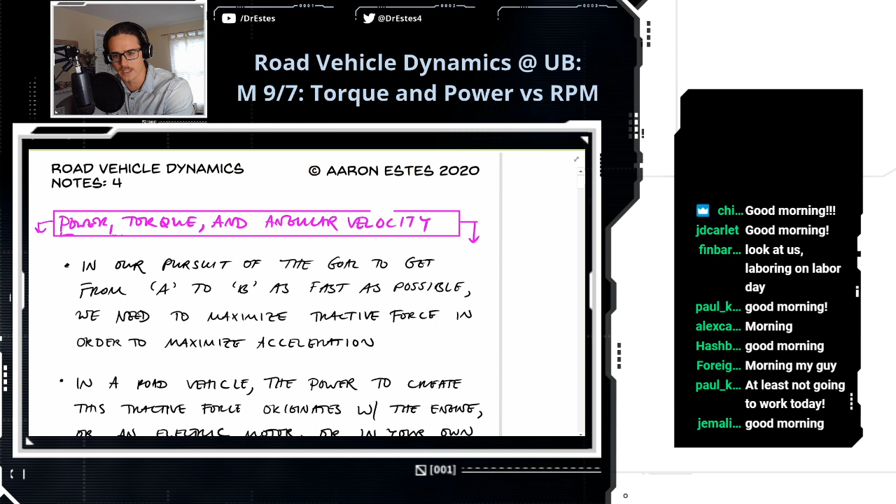Are any of you guys on a cell phone right now, just chilling on a lake somewhere this Labor Day? You're in a kayak, out in the wilderness. Are we gonna finish the example? Oh yeah, shoot, good call, Phil. Before we get into that, we have an example we have to finish. It involves a guy named Baxter. Thanks for reminding me, I totally forgot about that. We gotta finish that. There's almost a storm outside. Yeah, that's true, it's not the nicest day per se. I took a nice little walk this morning though. It was sprinkling just a little, and not too much though. Storms are exciting, yeah. I like being outside when it's got a nice little breeze, but it's not super cold. Maybe there's some mist in the air. Okay, let's get started. A walk? What is that? Yeah, walk, I did it.

Okay, let's finish this example on the unicycle.

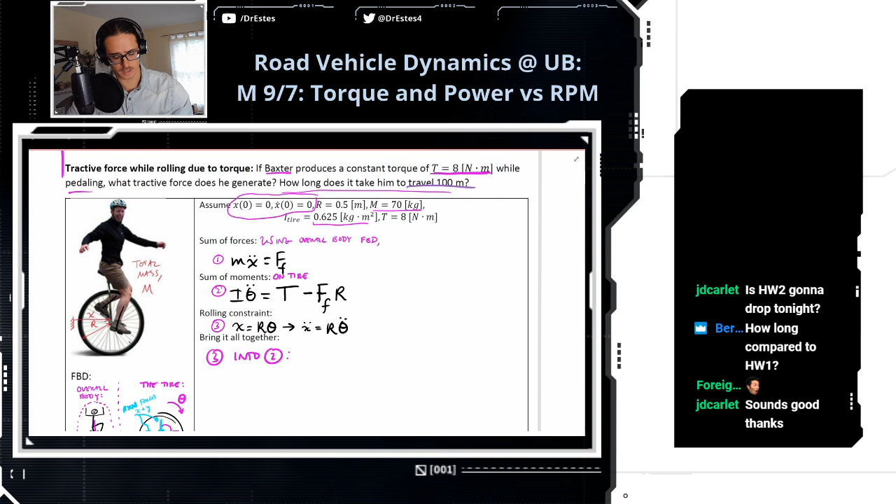So what we were setting up last time is the equation of motion for this unicycle. Just to quickly recap, you start with a free body diagram. We had the overall body, which includes Baxter and his unicycle, and so the only forces coming into this system are the friction force at the road interface, and then we have the weight and the normal force. The normal force, once again, to prevent him from clipping through the floor. We also did a free body diagram on the tire, and this is going to give us a relationship that lets us solve for this friction force.

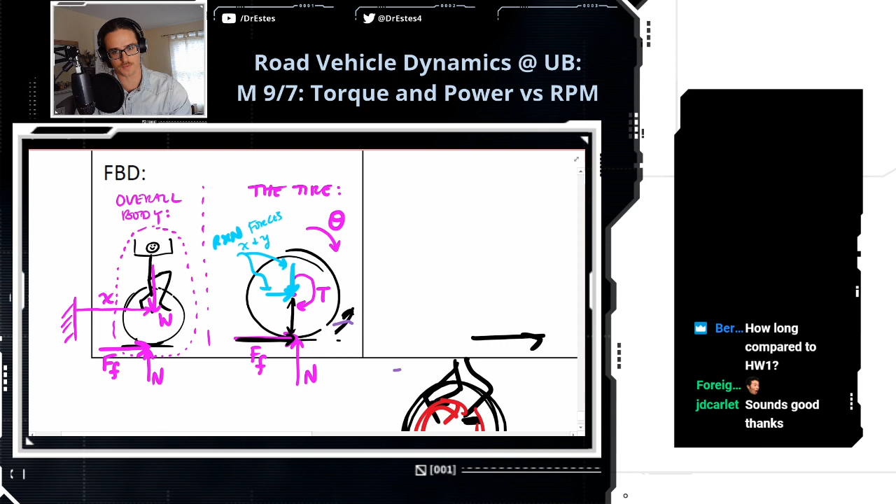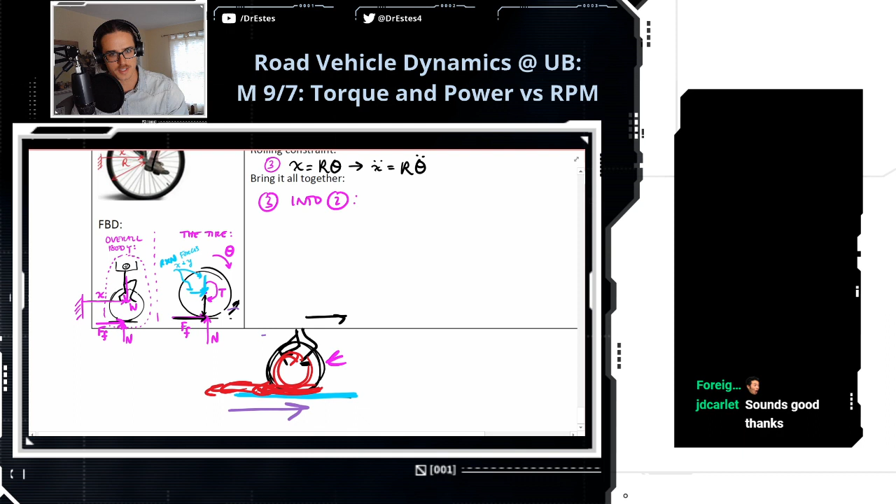So I don't know what was happening here. Looks like the unicycle is bleeding. We were discussing something last time. That's okay.

So we got these equations. We have this sum of forces: the mass times the acceleration is the friction force. We do the sum of moments on the tire: the inertia times the angular acceleration is the torque, but the friction is fighting that torque a little bit. And then we have this rolling constraint.

Yes, Baxter bled out. He won his race, expended all his energy, and then he died a lonely death.

Okay, so we're going to sub equation 3 into equation 2. So what I'm going to substitute from equation 3, I'm going to have the angular acceleration is the linear acceleration divided by r. And then I'm going to sub this theta double dot expression into equation 2. So we're going to have the moment of inertia times x double dot over r is the torque minus this friction force times the radius of the tire, which was half a meter.

All right, now if you look at equation 1 up here at the top, I'm going to solve for the friction force from that equation. So that's easy to do. I just got—oh wait, it's already solved. No, I want to solve for the acceleration.

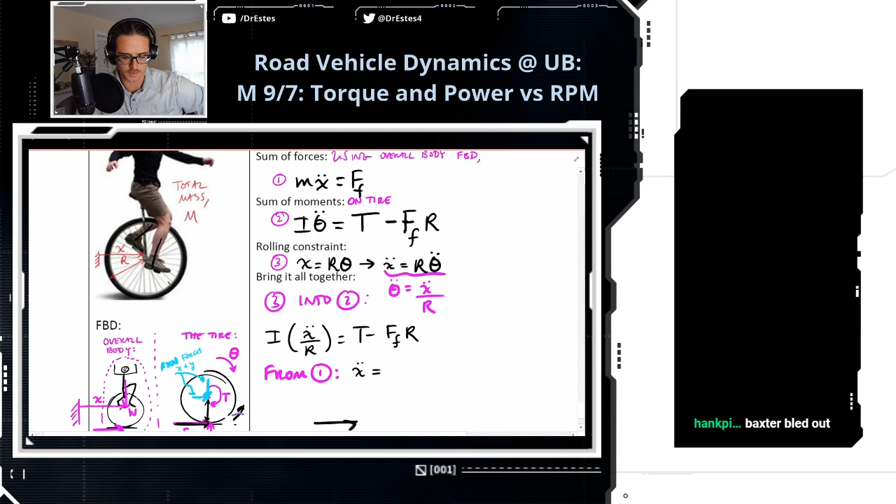Because then this will let me get an expression for the friction force, that's what I wanted to do. So the acceleration is that friction force, which is the tractive force, divided by m. Friction force and tractive force are kind of interchangeable here.

I want to substitute this acceleration expression in right here, so let's do that. I times the friction force over m times r is torque minus the friction force times r.

And then we're going to solve for the friction force here, and it'll be in terms of the torque that our friend Baxter is applying. That's kind of the relationship I wanted to show here, how torque at the pedals ultimately translates to tractive force at the road.

Okay, so we're going to go like up here. So the friction force, if you go through the work, it's going to be the torque over the radius of the tire plus the inertia of the tire, over the total mass times r.

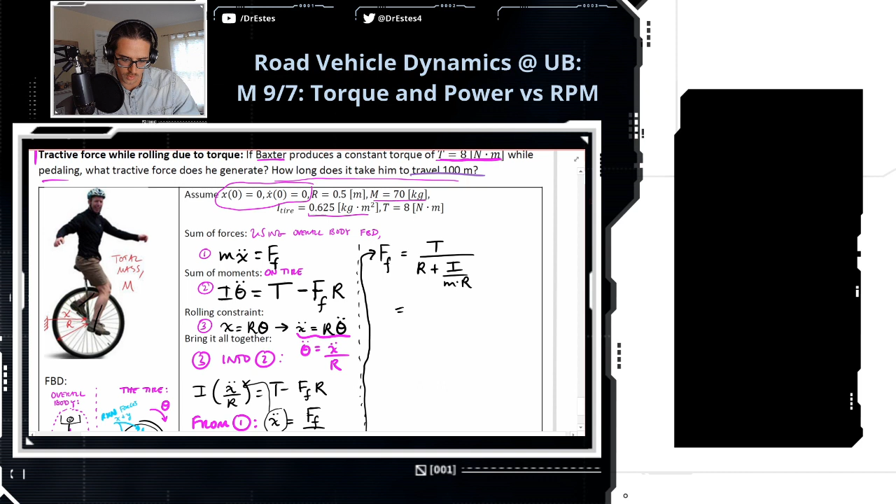And if we substitute in all of our numbers, we had 8 Newton meters of torque, the radius was half a meter, the inertia 0.625 kilogram meters squared, blah blah blah. So we're going to sub that in, and we're going to get a constant: 15.45 newtons.

All right, now given that he's producing this force the whole length of the race, let us figure out how long it takes him to finish that 100 meters. So I'm going to go back to equation 1, because now that I know the friction force, I can solve for the acceleration.

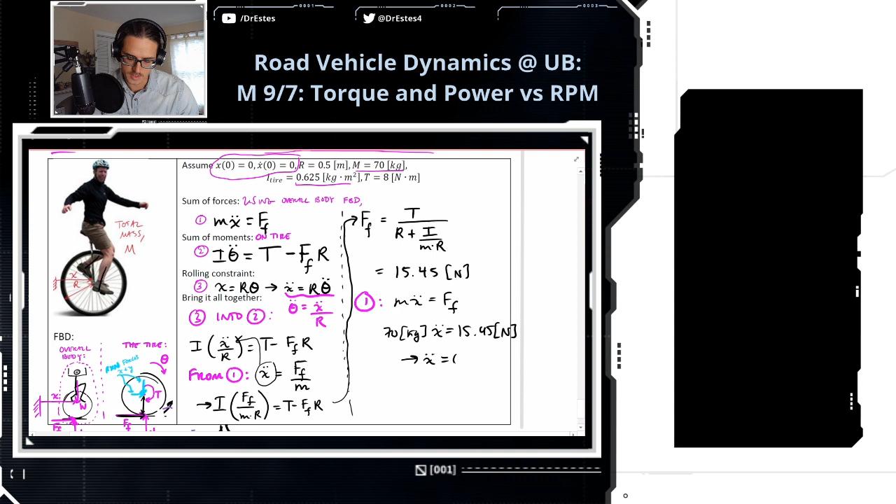Mass times acceleration is the friction force. So I got 70 kilograms between Baxter and his unicycle, times the acceleration is 15.45 newtons. So the acceleration is 0.22 meters per second squared.

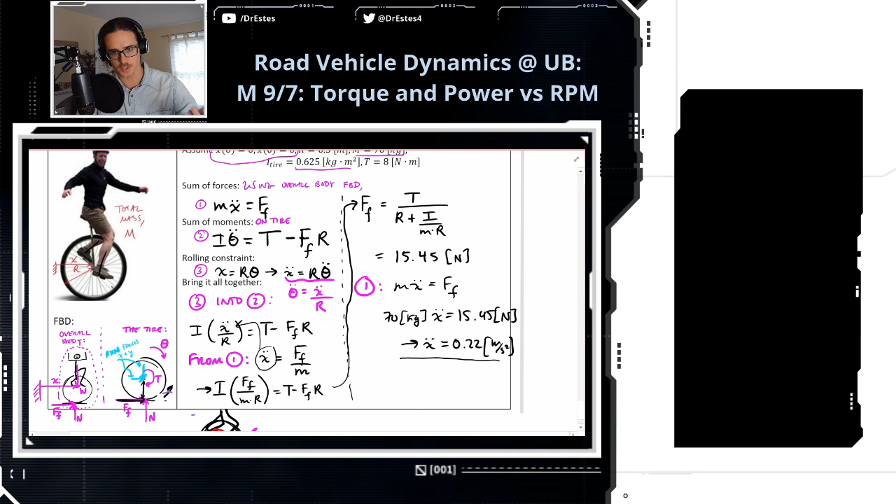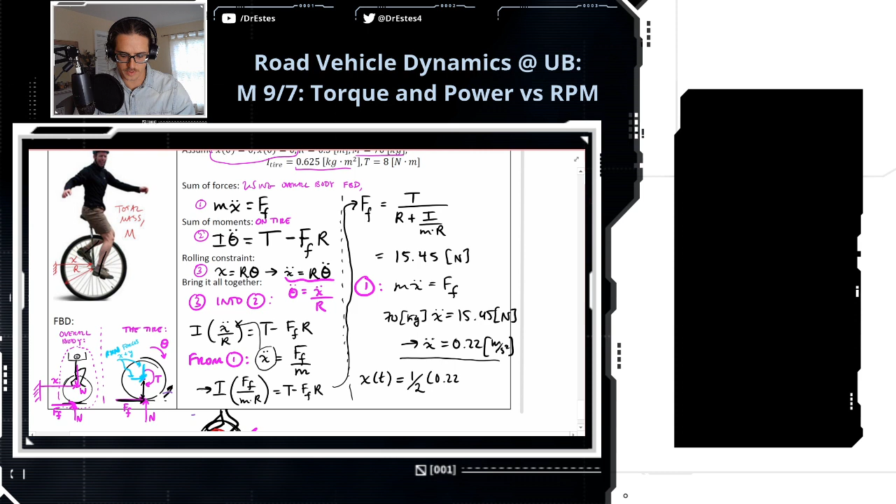And then from here, we can go back to our constant acceleration kinematic relationships. So from this constant acceleration, I know the position. If I start from rest, it's going to be 1/2 times the acceleration times t squared, so 1/2 times 0.22 meters per second squared.

And then we know the end of the race, he's going for 100 meters, so we can solve for the time that it takes him to get to the end. So it's the square root of 2 times 100 meters over 0.22 meters per second squared. Let's say this is the final time TF: 30.2 seconds.

I actually watched a couple YouTube videos of unicycle racing the other day. There's one guy who did a quarter mile, I believe, on a unicycle. He was going around a track at some high school or something, and he finished it in just under a minute. So if you think about that, Baxter's actually going pretty slow in this example. I'm going to re-engineer this example so that he's working a little harder next time, because 30 seconds for 100 meters is apparently not that impressive.

Okay, so just to clarify, the friction force is the tractive force in this example. That's exactly right, Finbar. So tractive force for a road vehicle is the friction force between the tire and the road.

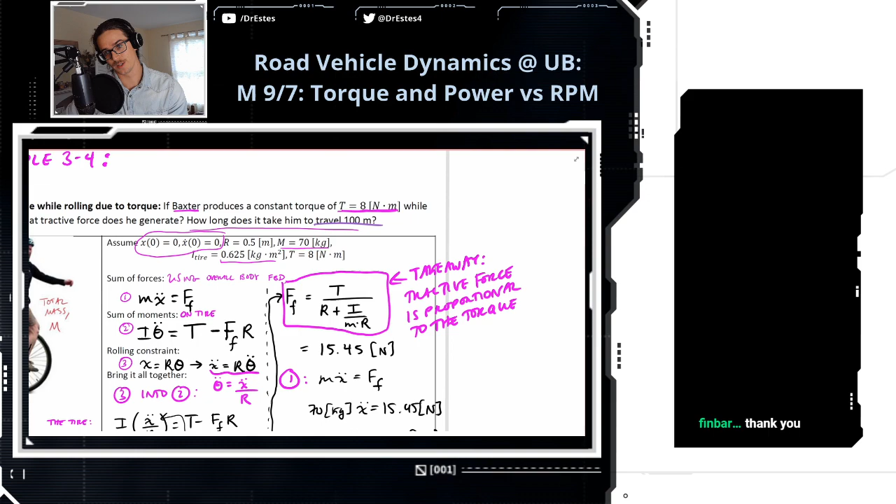Now on a bicycle, the human produces the torque. When we're talking about cars, it's going to be the engine that originates this torque. So that's a good segue into the next set of notes.

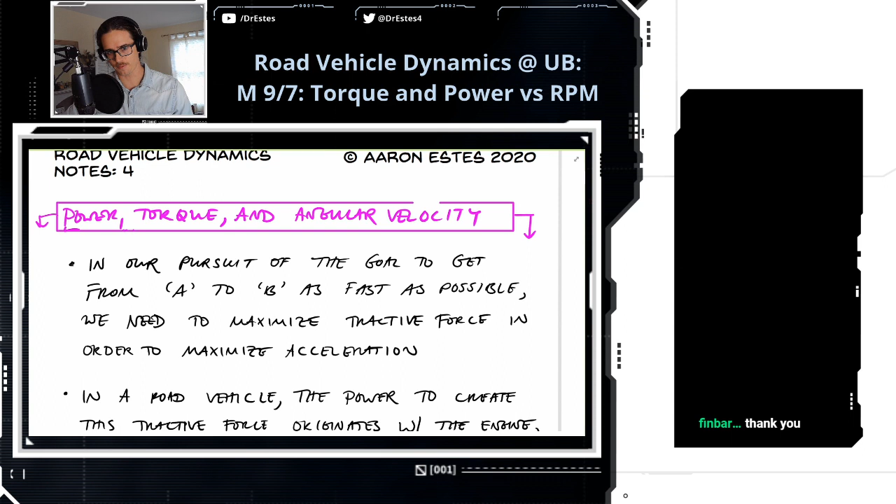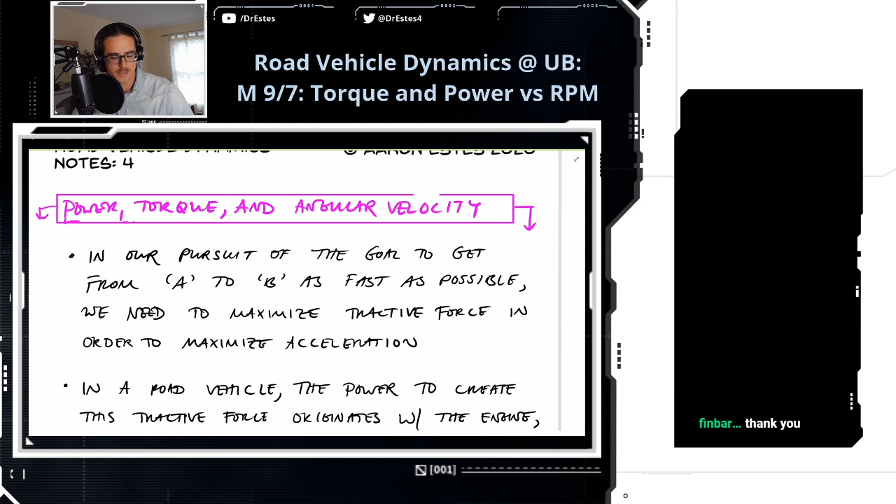Okay, so let's get into it. In our pursuit of the goal to get from A to B as fast as possible, that's our goal for this class, we need to maximize tractive force to maximize acceleration. Now, in a road vehicle, the power to create this tractive force originates with the engine, or if we're talking about a Tesla, it originates with an electric motor or a couple electric motors.

If the torque were too large, would it be slippery? Yes, we'll talk about this. You can generate so much torque that it overwhelms the ability of the tire to grip the road, so it exceeds the local friction coefficient there, and then you'll just spin out your tires. So it gets more complicated, but keep the principle in mind: as much torque as possible is generally faster.

And this power, if we're talking about bicycles, which we're doing some bicycle examples because I think it's a little more intuitive maybe than a car, you generate that power from your own body by pumping the legs. So this power that we generate...

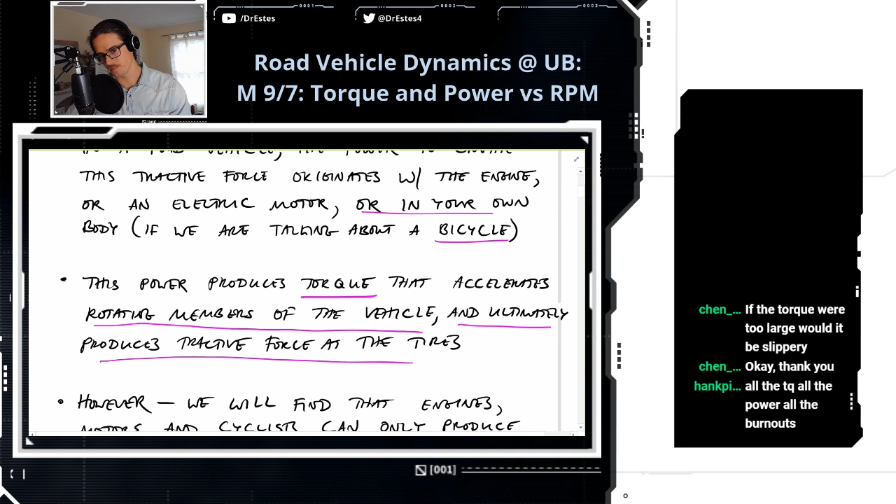produces torque, and we know torque is proportional to the tractive force. And this torque accelerates rotating members of the vehicle. We'll get into that probably Wednesday, like how it rotates the drive shaft, the gears, whatever. And ultimately, this rotation produces a tractive force at the tires, as we saw with Baxter. He rotated the pedals, and that produced a tractive force at the road.

Okay, so however, we're going to find out that engines, motors, and cyclists only produce torque and power effectively over a limited band of rotational speeds. So in the example, and we'll revisit this example, we assumed that Baxter was producing a constant torque for the whole race. And as the race continues, he's pedaling faster and faster because he's building speed. But he's producing the same torque the whole time, and that's not really realistic.

And because we can't produce torque effectively over all speeds, whether we're talking about engines, whatever, this is where gears are going to come in and save the day. But that's a topic for Wednesday when we talk about gears specifically.

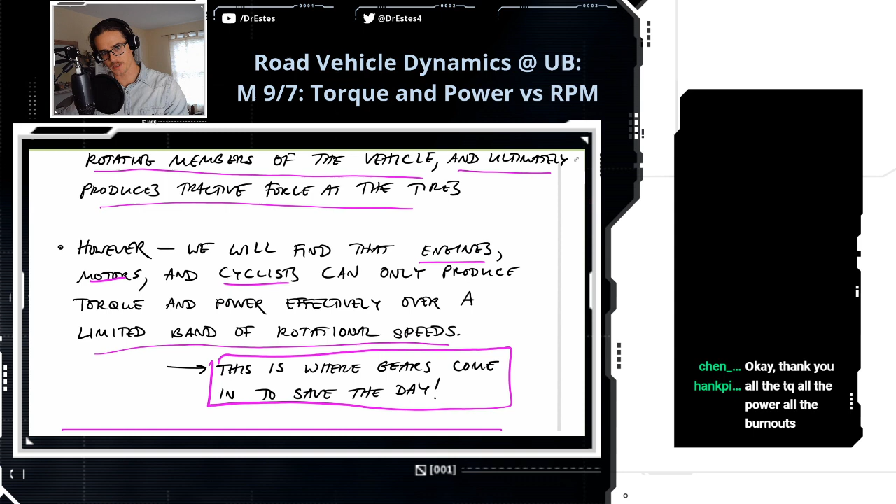All right, so let's talk about what power, torque, angular velocity is. What's the relationship? So we're going to talk about power. It's the time derivative of work. So if you have the handout, you can fill this along with me. And we know that the units of work, let me check my cheat sheet to make sure I got all this. Okay.

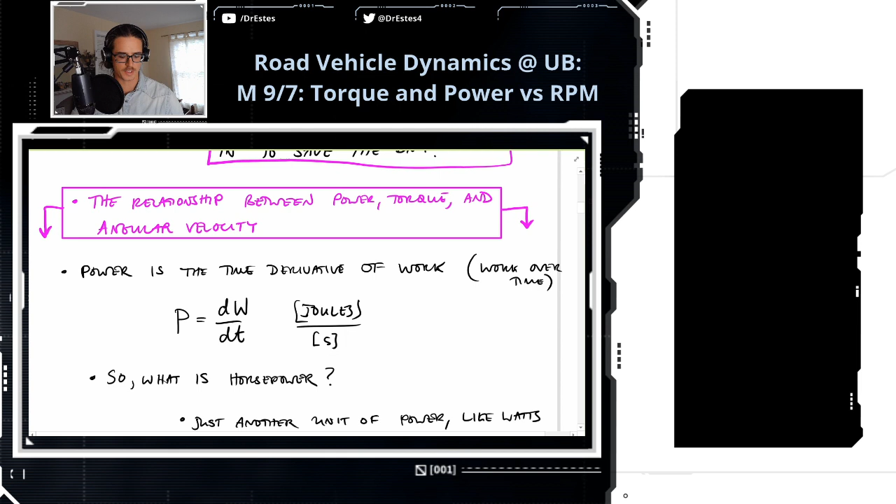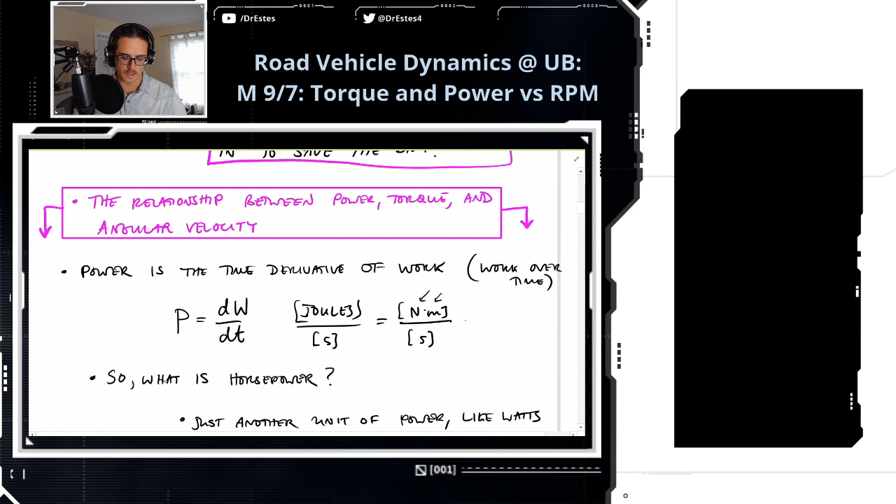Work is joules, time is seconds, so joules per second. So joules, that's also Newton meter per second, like work is a force over a distance. And in SI units, we call this the watt. So the unit of power is a watt.

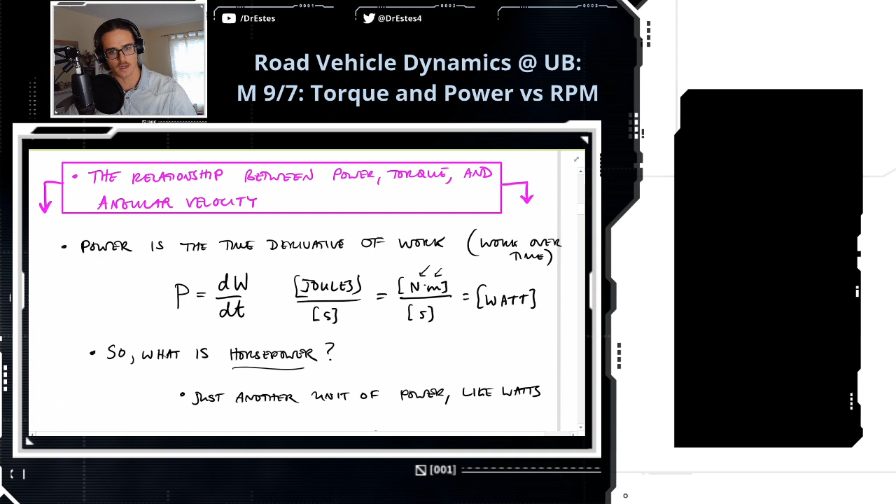But when we talk about cars, what is horsepower? Because that gets thrown around a lot. So it's just another unit of power, like watts. So it's just power, it's just a different unit. So let's break it down a little bit.

By definition, 1 horsepower lifts a weight of 550 pound force a height of 1 foot over a time of 1 second. So I made a little picture here. This weighs 550 pounds, we're lifting it a distance of 1 foot, and we're doing that by pulling over here, maybe it's a horse pulling it. And if we do that over 1 second, we've done 1 horsepower of work.

So if we dissect this image here, the work that is done is mgh, so the mass times gravity, that's the weight, 550 pounds, and we lift at a height h, which is 1 foot, and we do it over, well, I'll just put time here again, but it's 1 second. So if I put 550 pound force, that's the weight, I lift at a height of 1 foot, I do it over 1 second, that's 1 horsepower.

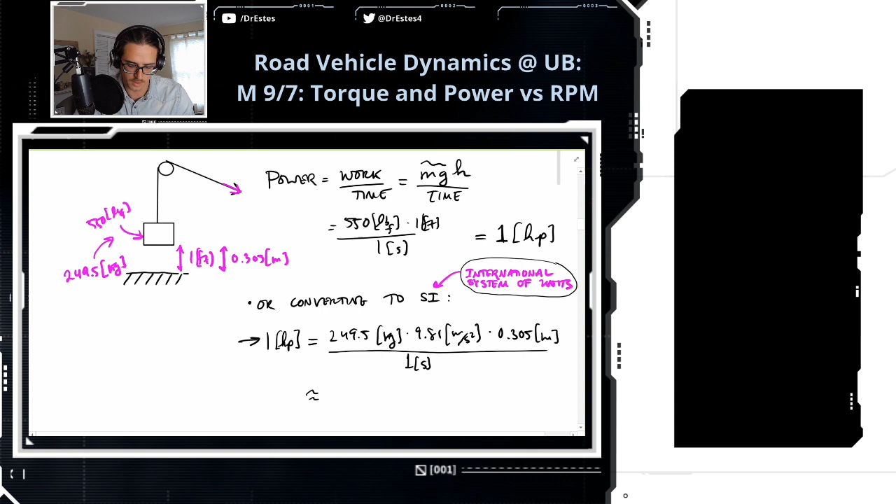249.5 kilograms is the mass, times G, 9.81 meters per second squared, that's the weight in newtons. Then we multiply that by the height that we lift this mass, or the horse lifts it, and put it over 1 second. So that's in SI units. If you multiply that all out, this is approximately 746 watts.

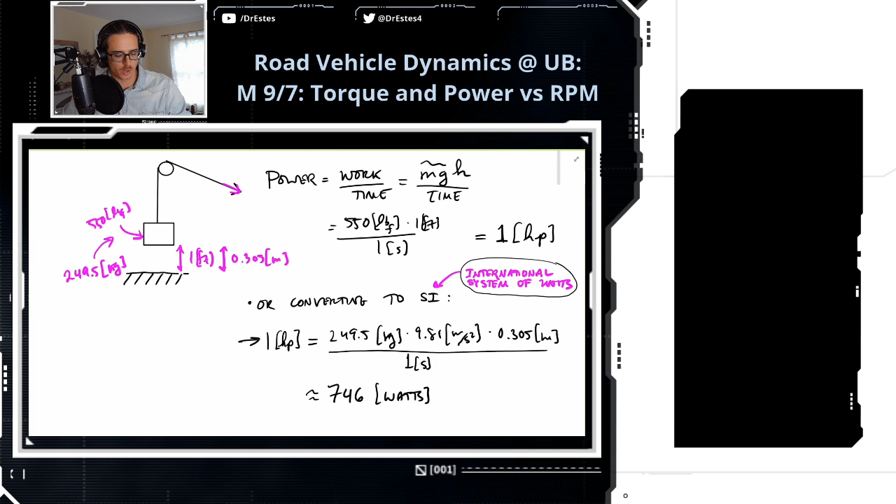So if you're producing 1 horsepower, that's 746 watts of power, or 0.74 kilowatts. All right, so that's horsepower. What is the relationship between power and torque?

The work done by a torque acting on some body, so it could be a cyclist doing work on the unicycle by acting on the pedals, or an engine doing work about the crankshaft. So the work would be the torque acting over an angular distance - torque multiplied by the angular distance over which it acts.

Think about translational work, it's force over a distance. So work done by a torque is very similar, it's torque over an angular distance. So the units work out for this: Newton meter, times radian, which is dimensionless, and I have an example about this later to show you why it's dimensionless.

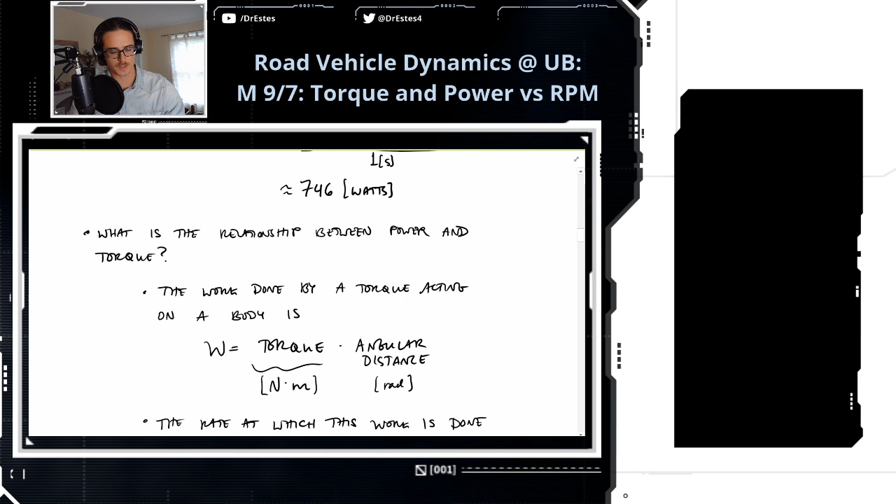So power is the rate at which work is done, that's going to be work over time. We can break it down this way: a torque and the rate over which it's doing work. So now we have Newton meters times radians per second. So power is a torque multiplied by an angular velocity.

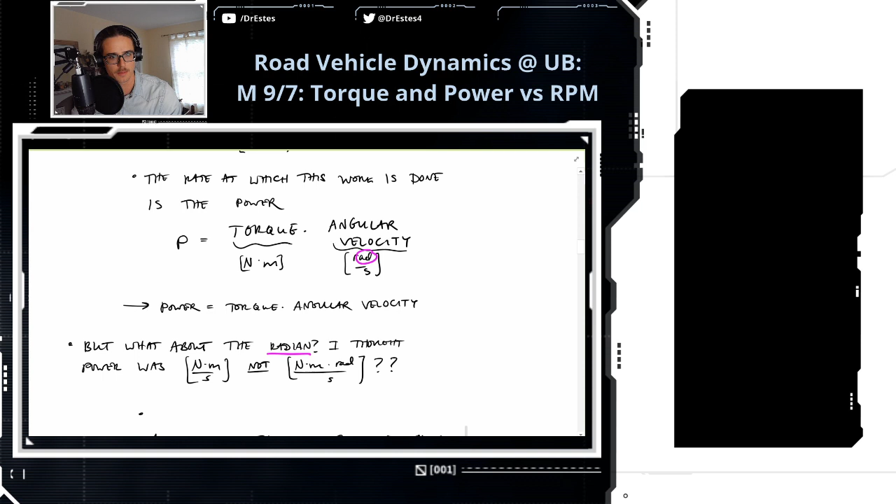But this brings up the question of the radian. What about this radians per second? Because up above I said that power was Newton meters over second, so joules per second or watts. I didn't say it was newtons times meters times radian per second. So the answer here is radians are dimensionless, but why, and what does that mean? Radians are dimensionless, so just pretend it's not there.

Okay, let's explain why. Why is a radian dimensionless? It is the angle, so it's a measure for an angle, but how is it measured? A radian is the angle subtended by a circular arc, as measured by - and we'll break down what this means, like subtended and whatever.

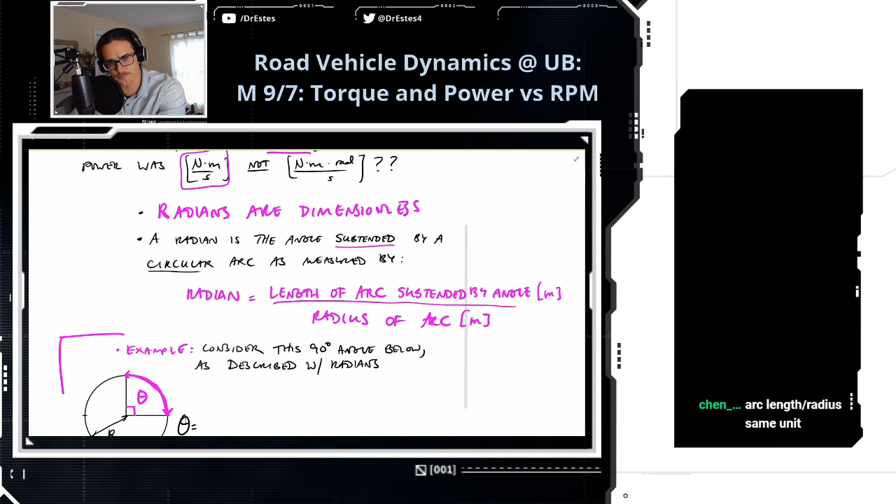But a radian is the length of arc subtended by the angle, divided by the radius of the arc. Arc length and radius have the same unit. This length of the arc is in meters, the radius of the arc will also be meters, or whatever length unit you choose, but those length units cancel out, so it's dimensionless. This will make more sense when we show an example.

So let's consider a 90-degree angle. We know in radians, 90 degrees is pi over 2, right? So let's show how it gets broken down. Here's the angle, theta. Now this circle - this arc is a circular arc. That's why I drew the rest of the circle here so you can see it's got a circular shape, but this is the arc subtended by the angle.

If you draw from the angle some lines projecting out, and connect those two lines with a shape, that shape is subtending the angle. So this is a special case where the angle is subtended by a circular arc, not some other shape. So let's get the length of this arc: if we did the whole circle, that would be the circumference, which is 2 pi r. But this is only a quarter of the circle, so it's 1/4 of the circumference. That's the length of the arc that subtends this angle, and we divide it by the radius of the arc, and this circle has radius r.

So you see what's happening, don't you? The r's cancel, and you're left with pi over 2. And the units are meters over meters, and those cancel. So when we say radians, it makes it sound like it's a unit, but really it's just an idea that describes an angle.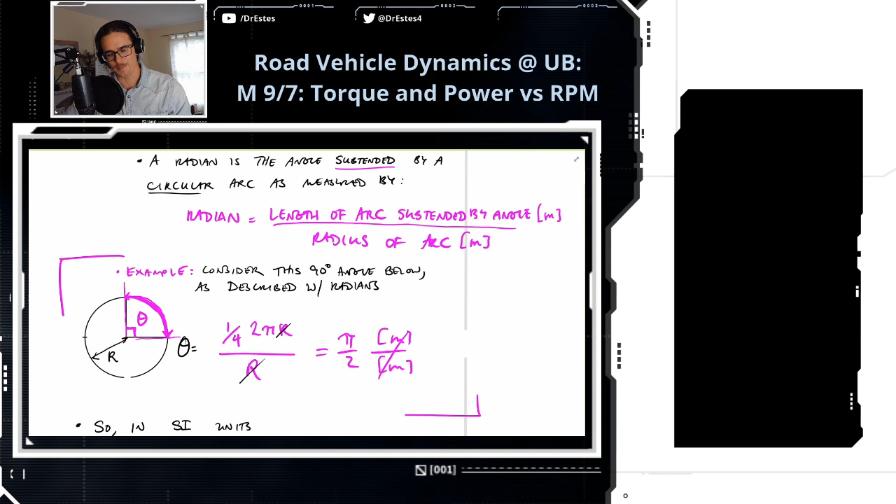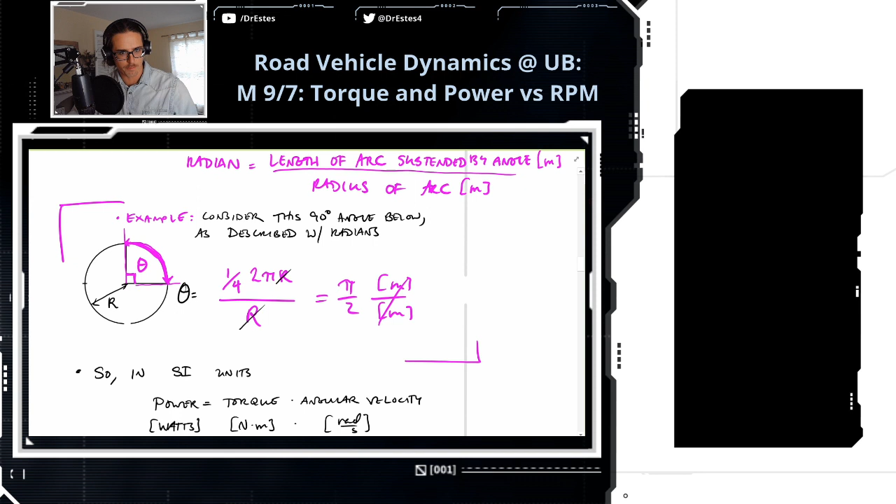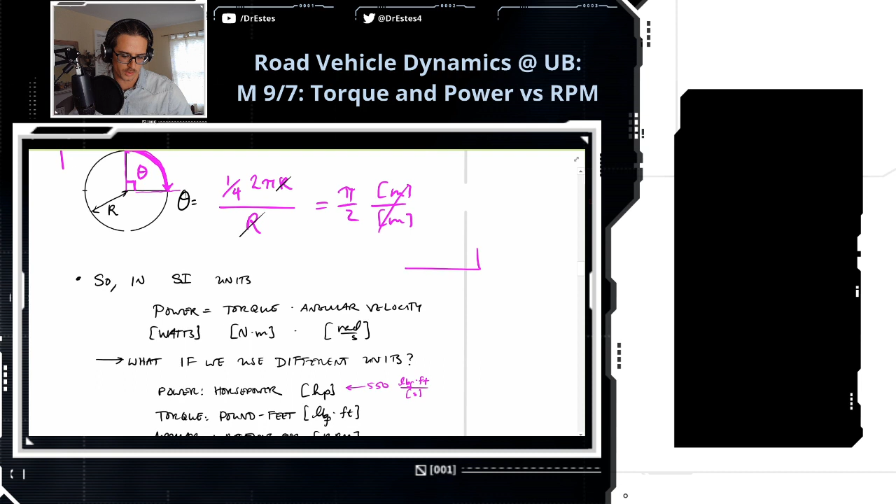Okay, so all that to say, just because we have power, which is torque times an angular velocity, really it's just energy over time. Now I want to show you something here.

When we talk about cars, there's a conversion we typically get into: you have your engine power in horsepower, that's popular. You have your torque in pound-feet, and then you talk about engine speed in RPM. So when people talk about vehicle performance, they might say it produces 600 pound-feet of torque.

I know it's particular, I'm gonna Google this real quick, I don't want to mess this up. It's foot-pound. Wait, you guys just contradicted each other. Pound-feet or foot-pound? Foot-pound, yeah I think it's foot-pound. Hank, what happened, wait you're wrong? Pound-feet? Wait, hold on, are you guys sure? It's pound-feet? Pound-feet, we should do a vote. Are they interchangeable? Okay let's see, you guys are saying pound-feet. They tripped me up. I've heard both, it's foot-pound. Newton meter is pound-feet, I mean like you could say it's the same, it's a foot times a pound, but people are really particular about what it is.

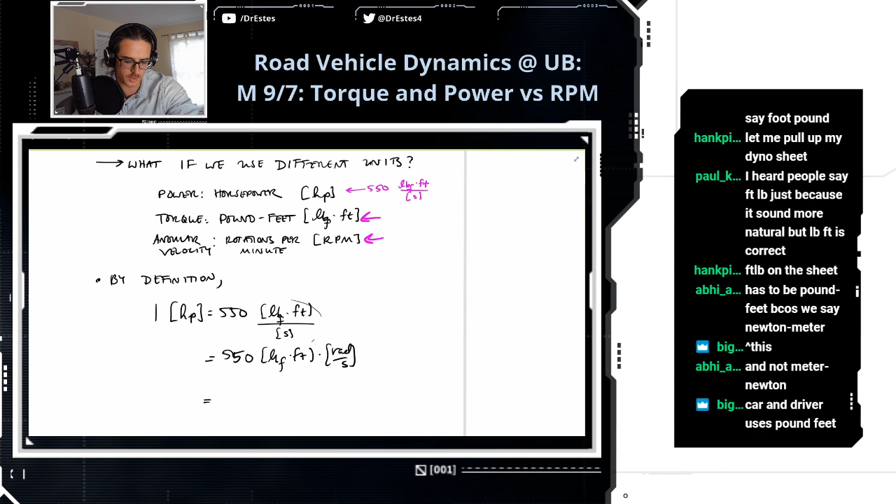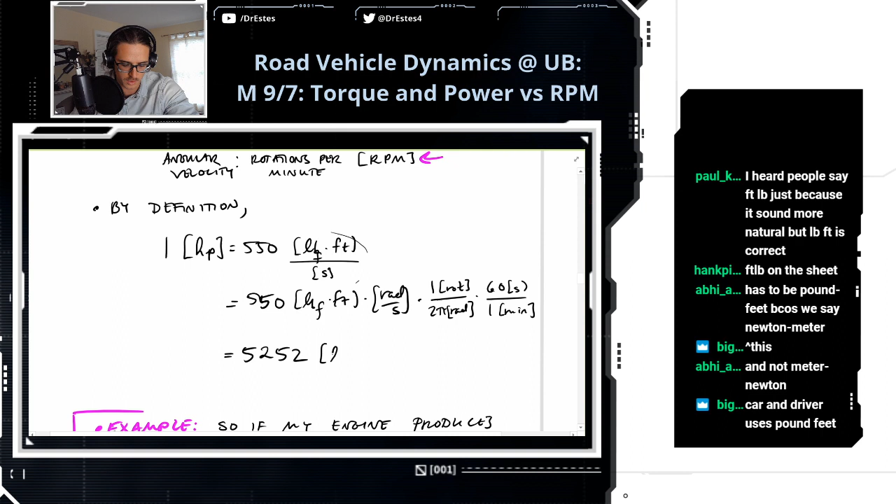Car and driver uses pound-feet, they're reliable, they're gearheads. So we're going to convert this radians per second into RPM. 2 pi radians is 1 rotation, and we know 60 seconds is 1 minute. So these units cancel, and when you multiply it all out, this is going to be 5252, and I'm just sticking with pound-feet here, times RPM. So 1 horsepower is 5252 pound-feet of torque times 1 RPM.

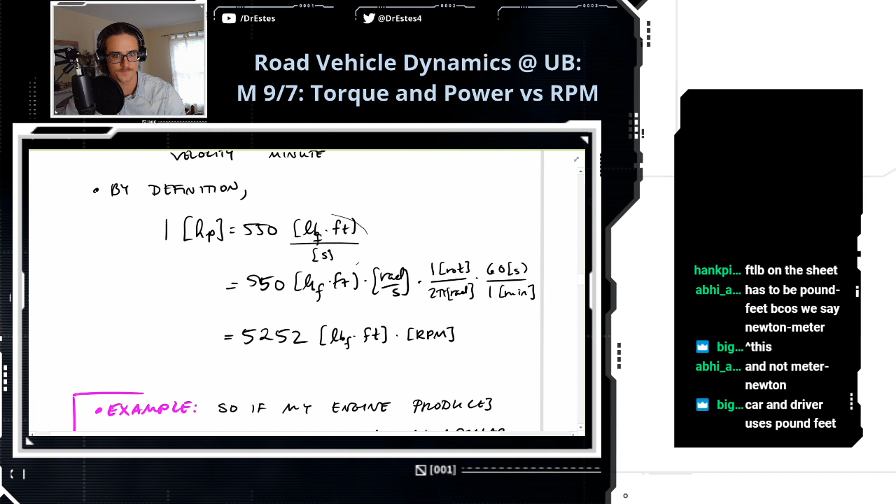So let's do an example here to show how you would typically use this conversion. All right, so the question is, if my engine produces 650...

I found that pound-feet is the unit for torque and foot-pound is the unit for work. See, that's what I'm talking about, Paul, there's something going on there. So we'll keep using pound-feet. If my engine produces 650 pound-feet of torque at an angular velocity of 4,000 RPM, so my engine is spinning the engine shaft at 4,000 rotations per minute producing this much torque, what is the power in horsepower at that engine speed?

Pound-feet wins again. Yes it does. Okay, so let's work this out. So I know that...

Why do I put a little f on the bottom of your pound? To drive home that it's pound force, not pound mass, that's why I do it. Pound, so the F is for force.

So let's calculate the power. Power is... is this slug the same as pound mass, Finbar? Can't remember off the top, that always gets a little confusing, this pound mass, pound force, and slug thing. Okay, so let's get the power.

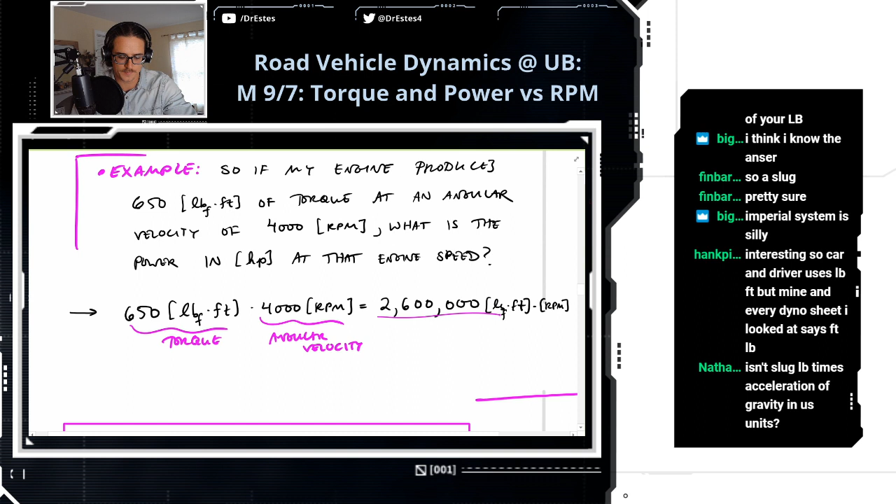650, we know it's torque times angular velocity, times 4,000 RPM, and if you multiply this out, we're producing this much power: 2,600,000 pound force times feet times RPM. All right, so once again, power is torque times angular velocity, and it produces this: 2,600,000, blah blah blah blah blah.

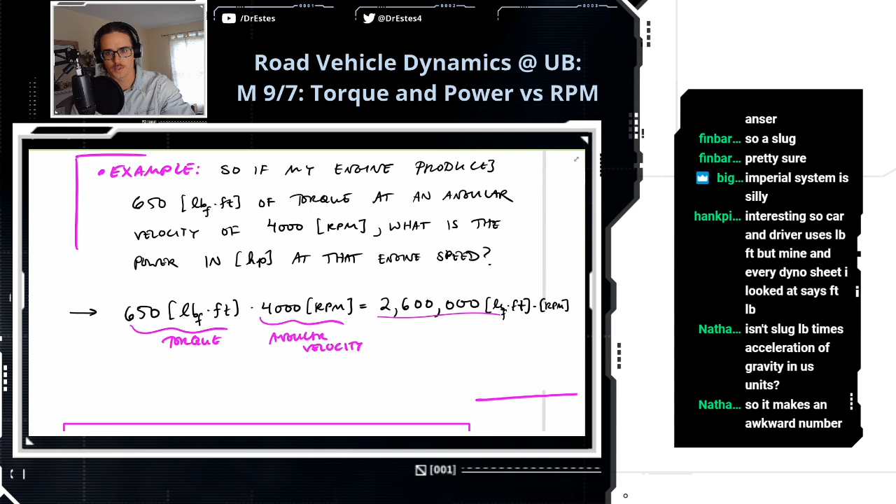But we know from up above that, interesting, car and driver uses pound-feet, but mine and every dyno sheet I looked at says foot-pound. So I don't know what to tell you, I don't know what to tell you.

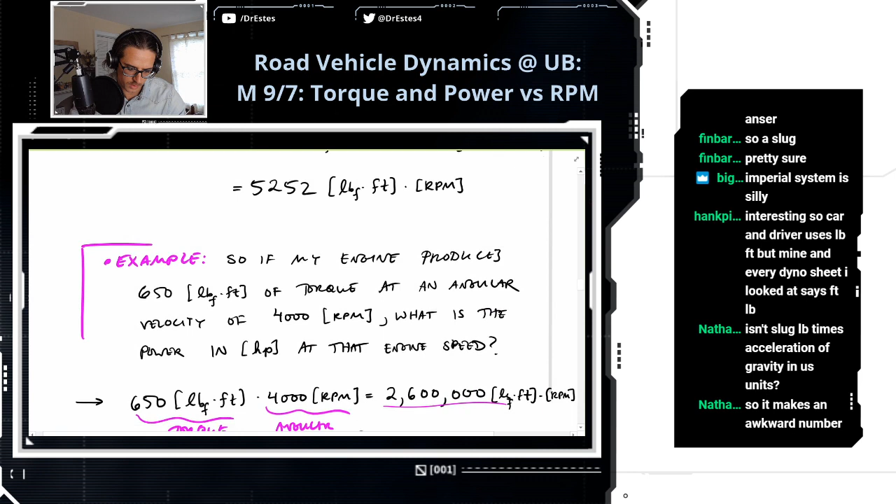Okay, but using this up above, let's go back to this color: 2,600,000 pound-feet times RPM. Well, we know that there's 5252 pound-feet times RPM in 1 horsepower. So basically I have to take this number and divide it by 5252, and that's going to give me 495 horsepower.

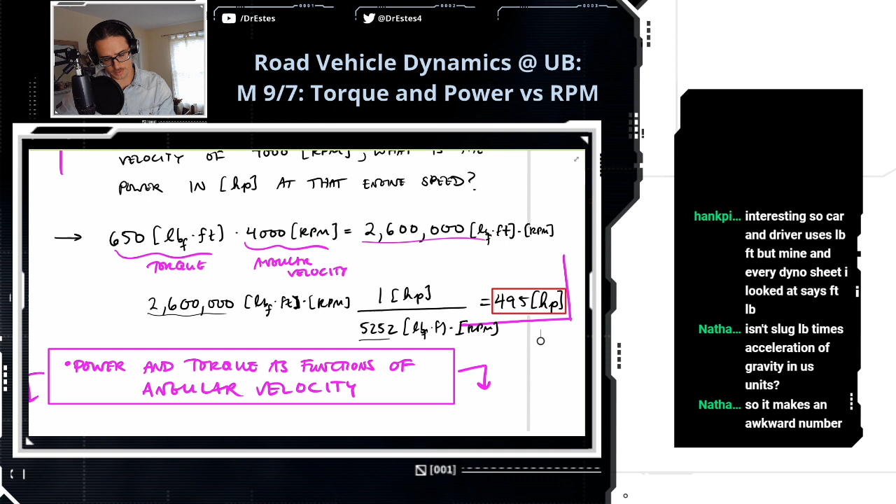So if you use this formula a couple times, they give you just a pocket formula. If you want to figure out horsepower, you take your torque in pound feet, multiply it by your RPM, divide it by 5252, and that gives you your horsepower.

This is the pop soda debate of engineering. Yeah, I think I say soda, by the way. I'm from Arizona, so I don't know if that's... Do you guys say soda? Who says pop? I feel like people from Minnesota would say pop.

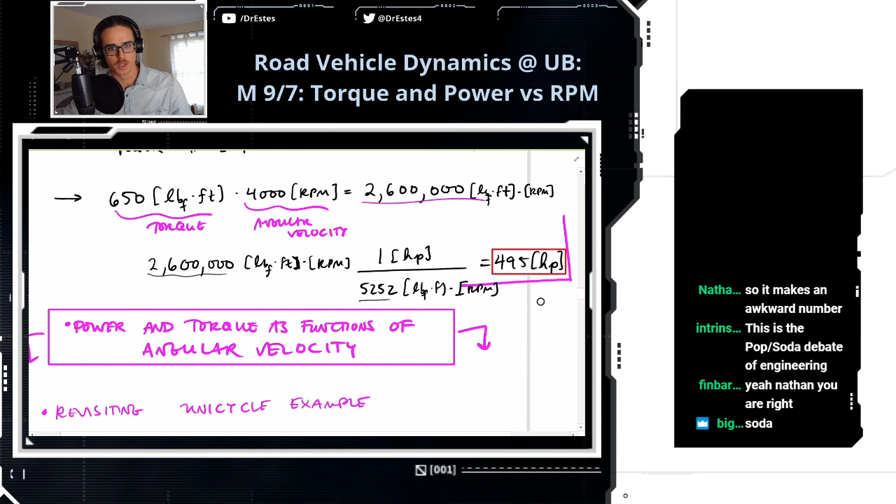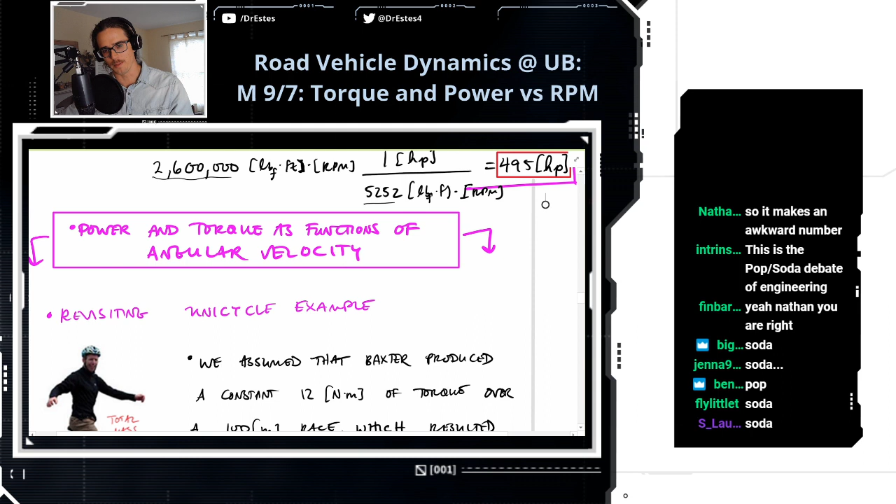Okay, you thought we were done with Baxter? Well, there he is. He's back. Apparently he didn't bleed out at the bottom of the last set of notes. If you're from Buffalo, you say pop. It's a Buffalo thing? Okay. Pop hurts to say. Pop! It does take a lot of work.

Okay, so let's talk about Baxter again. I think this is the last time we're going to see Baxter, so don't... Okay, oh, I just realized I didn't...

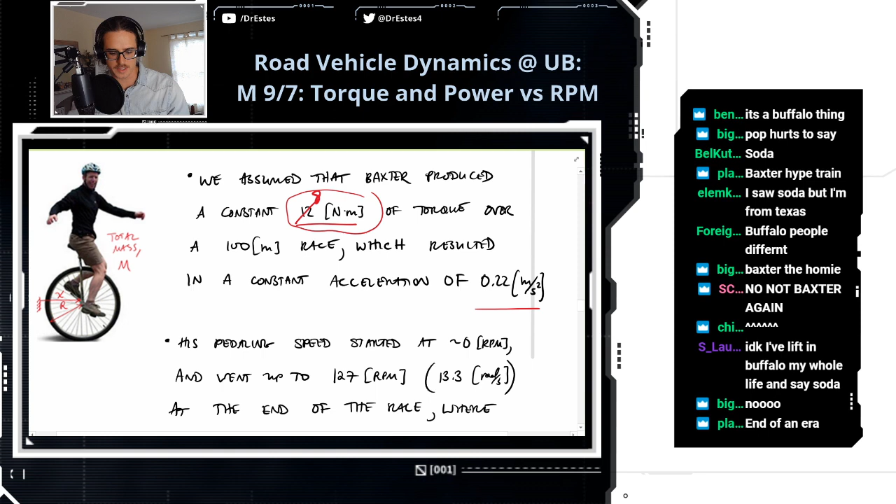So we assumed that Baxter produced a constant... Actually, I think we said he produced 8 Newton meters of torque, but because I wrote 12 here, we're just going to go with it. I guess he got stronger in the interim in the past couple minutes. So, okay, really it should be 8. Whatever. So he produced this much acceleration constantly.

Now, we didn't calculate this at the end, but obviously, if he started from rest, his pedaling speed was 0 RPM. If you went back to the example, by the end of the race, his pedaling speed gets up to 127 RPM, which is doable on a unicycle or any bicycle. We'll see some stats later on. But at the end of the race, the angular velocity of the pedals over time is this linear function.

So, big gains for Baxter, that's right. So,

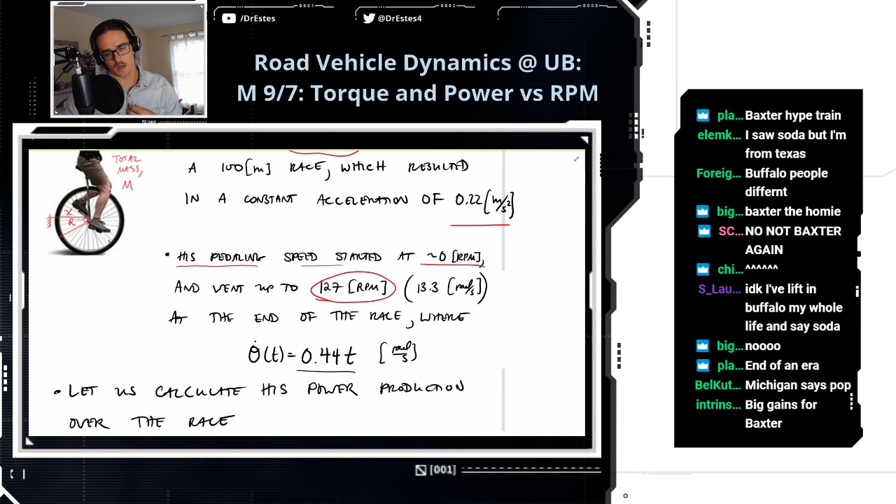From our equation of motion, if you were tracking how fast he's pedaling over time, he's linearly pedaling faster and faster until the end of the race if he produces a constant torque. And that makes sense because constant acceleration produces a linear increase in velocity.

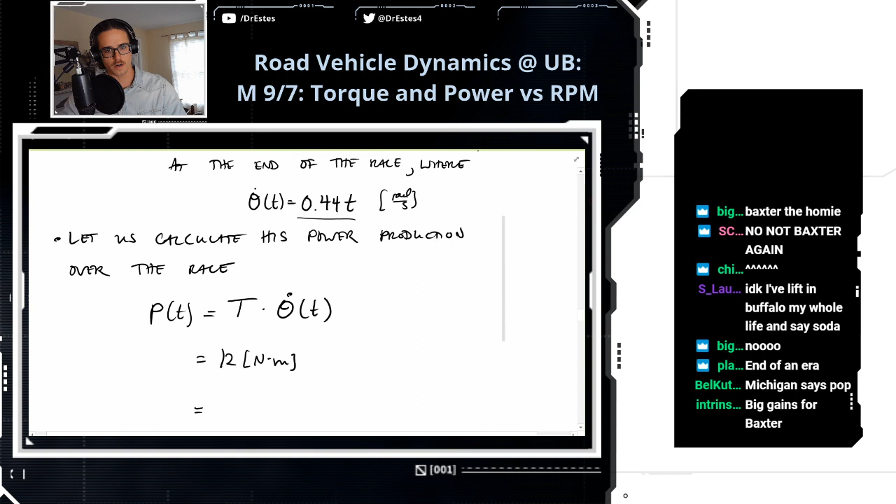So if we talk about the power that Baxter was producing, it's torque times angular velocity. I know I have the wrong figure here. It really was 8 newton meters, but I'm assuming he got a little stronger, whatever.

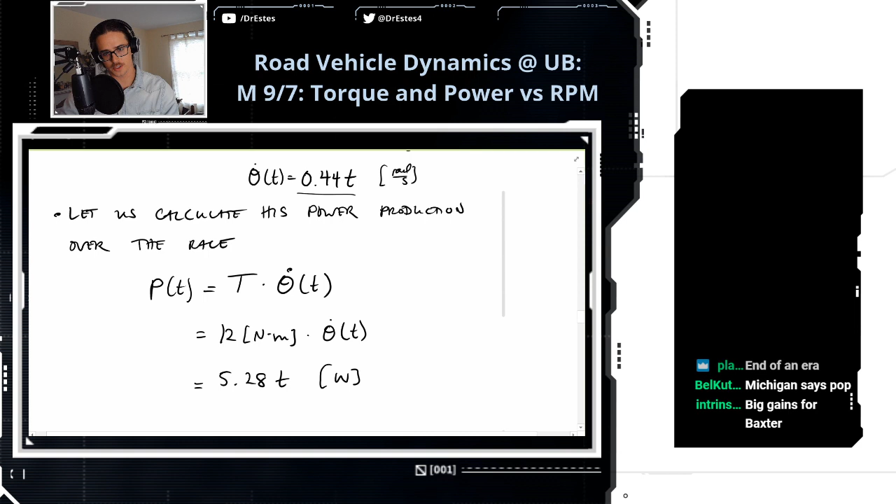So anyways, you'll find that the power is also a linearly increasing function over this race. So in order to maintain constant torque, Baxter has to increase his power over the duration of the race, like a Super Saiyan.

So let's put this in a graphical representation here. Let's plot the power of Baxter as a function of the pedaling rate during this race. Okay, so, unlimited power. I know, good old Palpatine.

Okay, so the torque is this red line, and I just said it's 12 Newton meters over... Baxter is the Senate.

So this is the start of the race. He starts at 0 RPM. By the end of the race, he gets up to like 127 RPM. Do it. And constant torque.

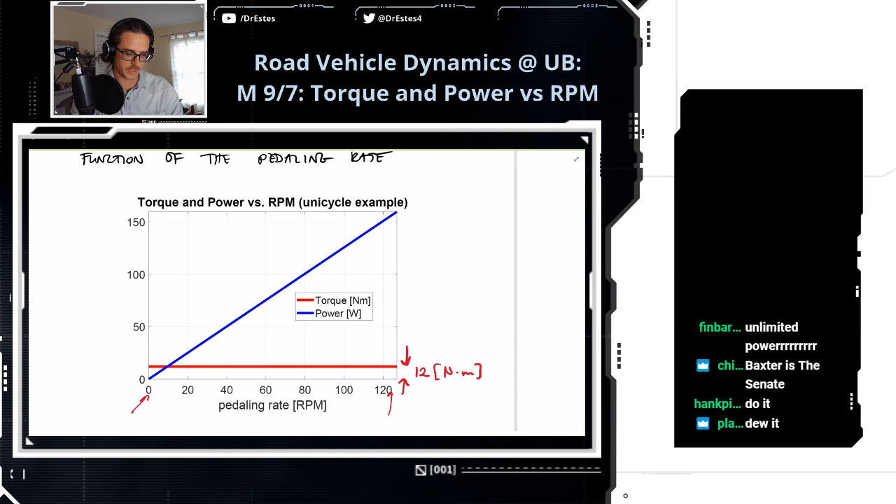Now, power is angular velocity times torque. So we see that the power is linearly increasing. And really, if we maintained this assumption of constant torque and let Baxter race all day, his power would just increase without end, which is kind of freakish.

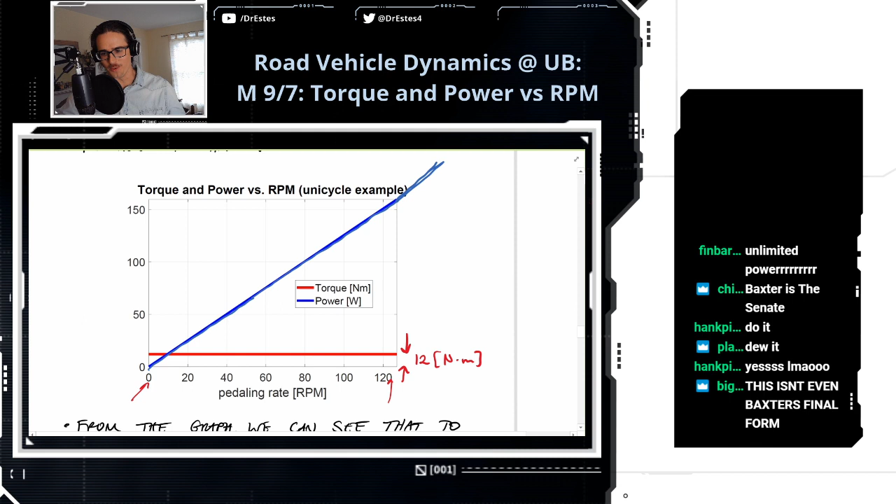And you thought he was just a really nice guy. So this isn't really realistic. So what I want to show you next is torque and power versus RPM for a real... This isn't even Baxter's final form. No, you got to understand, this is not something normal.

Under that veil of just a nice looking average Joe, that's really not what's going on here. That's a cover story. Okay, so from the graph, we can see that to maintain a constant torque at the pedals, power must increase linearly at a specific rate as a function of pedaling speed.

But we know that's just not going to work in real life. And people have actually done scientific studies of this. In real life, when a cyclist pedals as hard as they can, we find a relationship that looks like this. Let's break this down. So I have two graphs here.

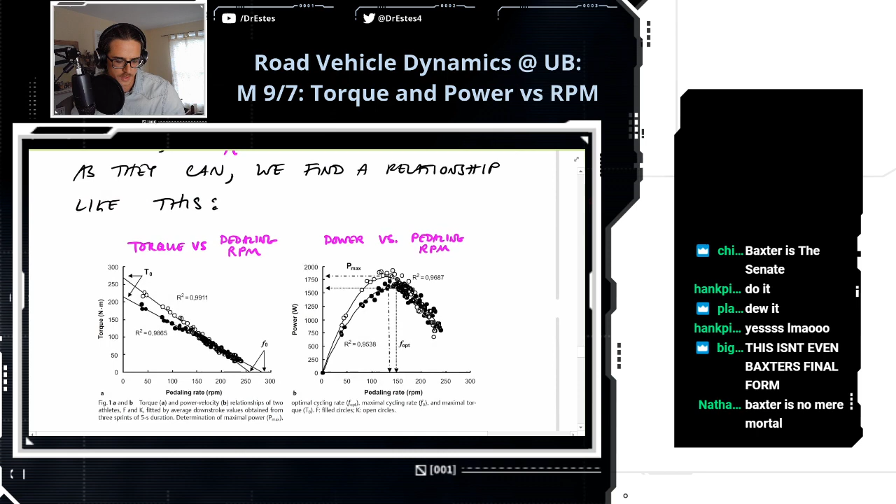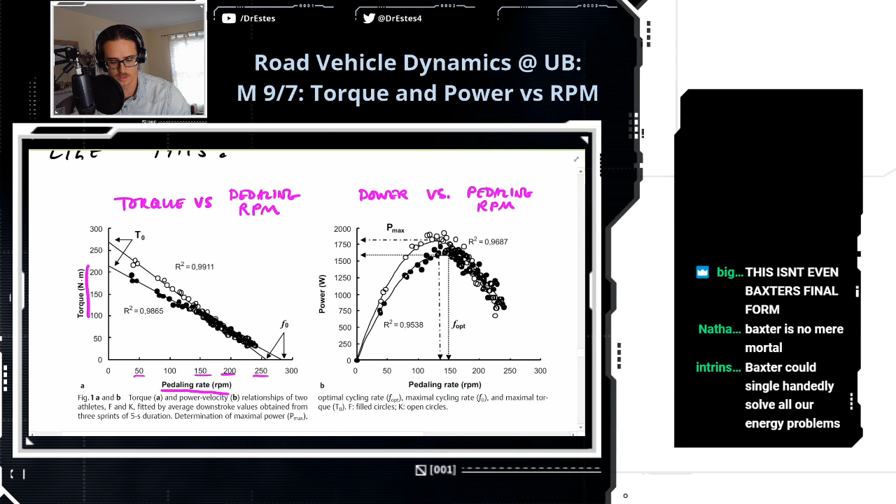One graph is torque versus pedaling speed, that's the one on the left. For an expert cyclist, there's two lines here because they had two expert cyclists for this study. You see this linear relationship: torque on the vertical axis, pedaling RPM on the horizontal axis. A cyclist produces the most torque at low pedaling rates, like 50 RPM, and they can't maintain that torque at higher pedaling rates. Once you get up to 150, 200, 250 RPM, you're not producing as much torque at all. And the power, unlike Baxter, increases to a point since they have to increase power to keep up that torque at higher pedaling rates, but humans have finite power, not unlimited power. So this power drops off at higher pedaling rates.

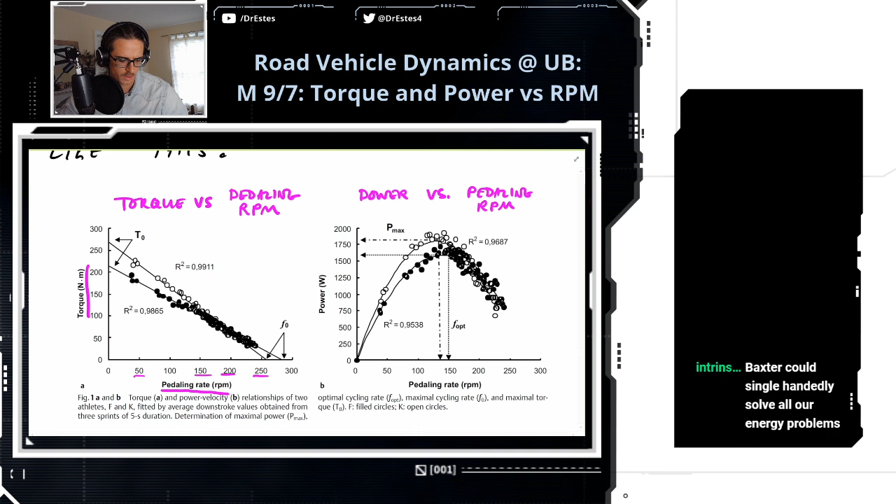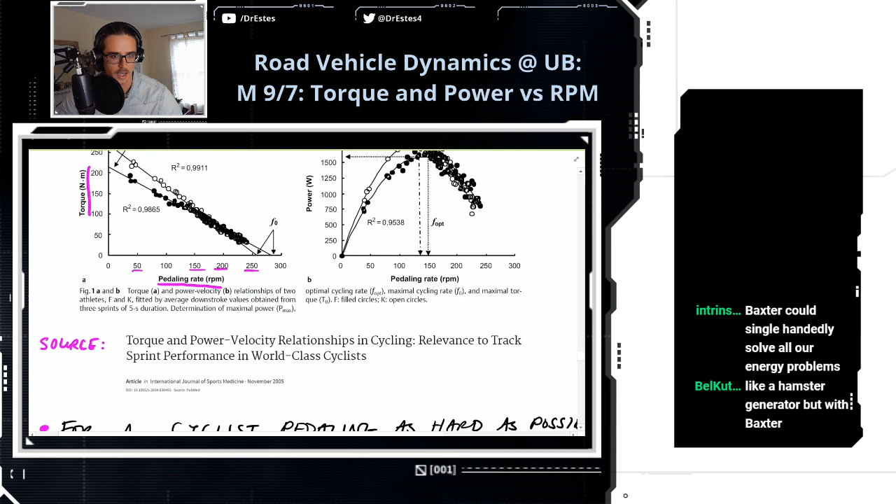So this is data from real cyclists pedaling as hard as they can. It's like a hamster generator, but with Baxter. That's right, and I put the source here if you want to look up the paper yourself.

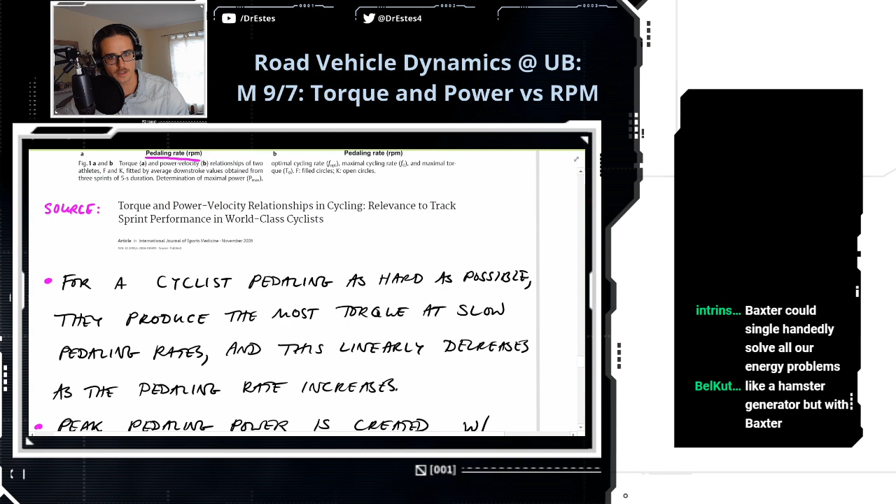So here we go. For a cyclist pedaling as hard as possible, they produce the most torque at slow pedaling rates, and this linearly decreases as the pedaling rate increases. Peak pedaling power for an expert cyclist is around 150 RPM.

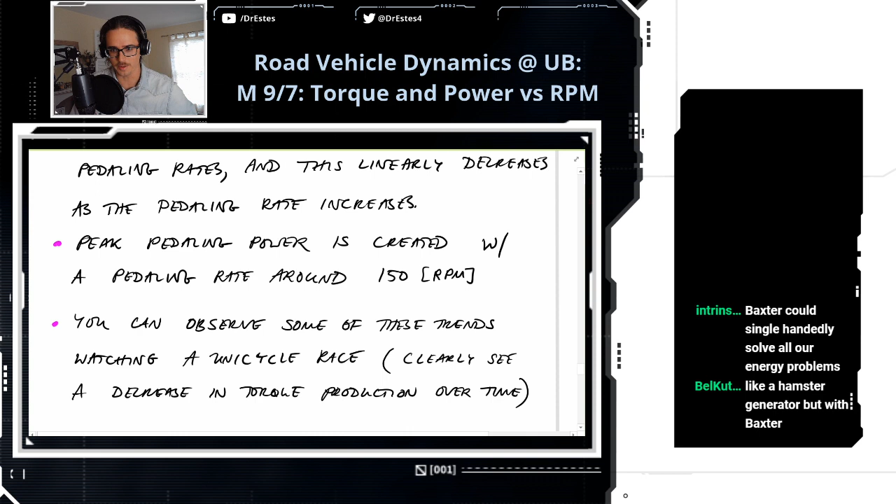Oh, we need to watch a unicycle race. So you can see there's actually not very many videos of unicycle racing. It's apparently not that popular. Let me pull this one up.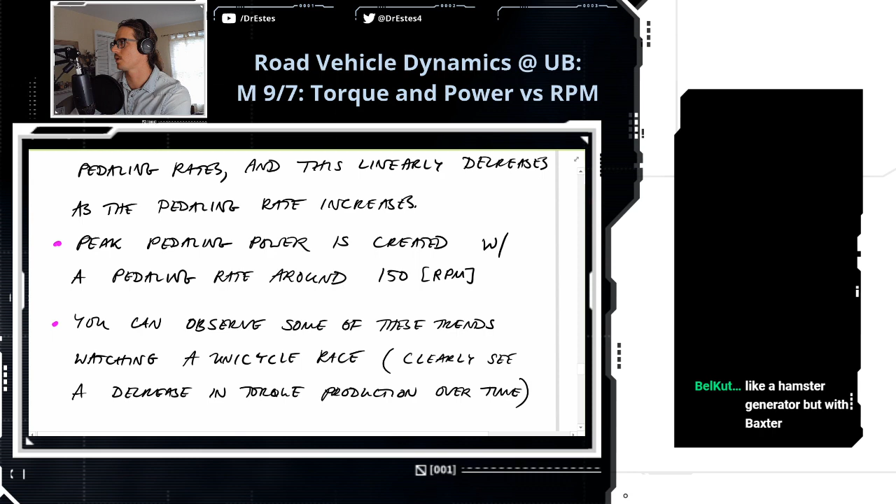But you're gonna see how torque drops off. Okay, here we go, let me pause these tunes really quick. All right, we gotta go over here. This is also really cute, by the way.

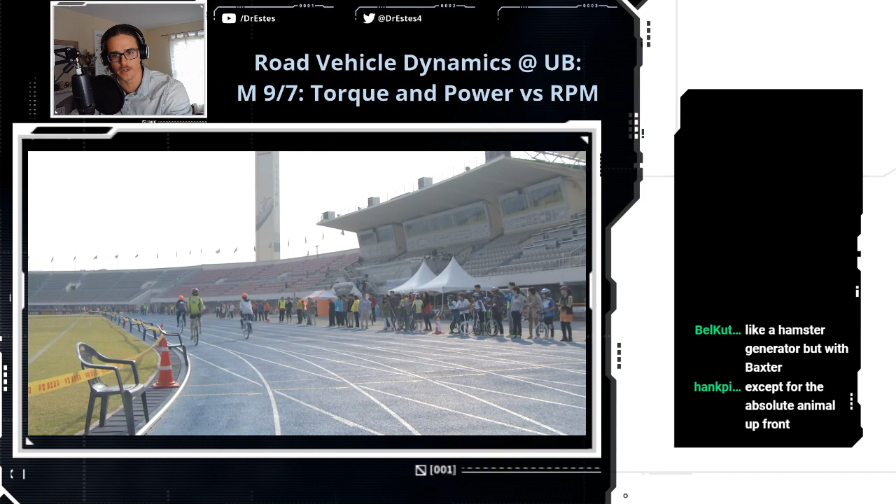What I want you to notice is the acceleration at the beginning is high, and then they don't accelerate that much. You can see they're moving, and if we watch them go, their velocity just tops out. Out of the blocks, they're pedaling slowly and accelerating, but now, oh that poor guy fell off. But they reach a max speed pretty early. Oh yeah, except for the absolute animal up at the front. Oh, she's a unique case right here, she's kind of pulsing it seems like. She accelerates and then, built for speed.

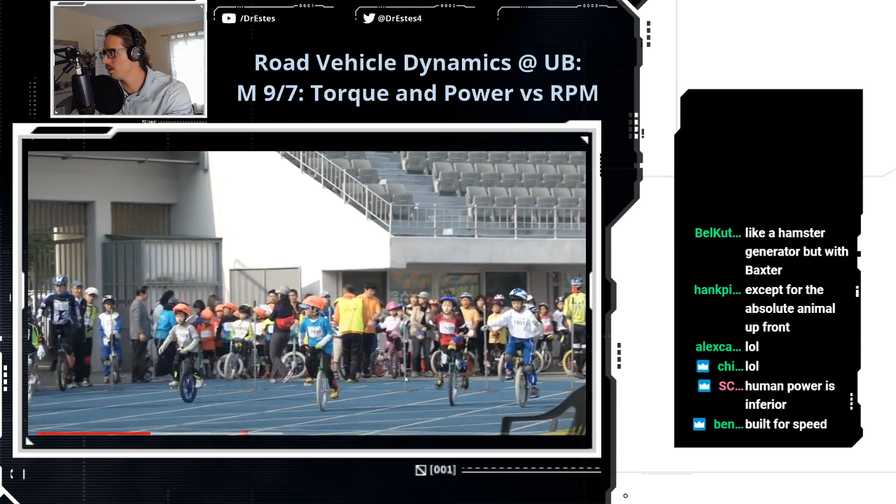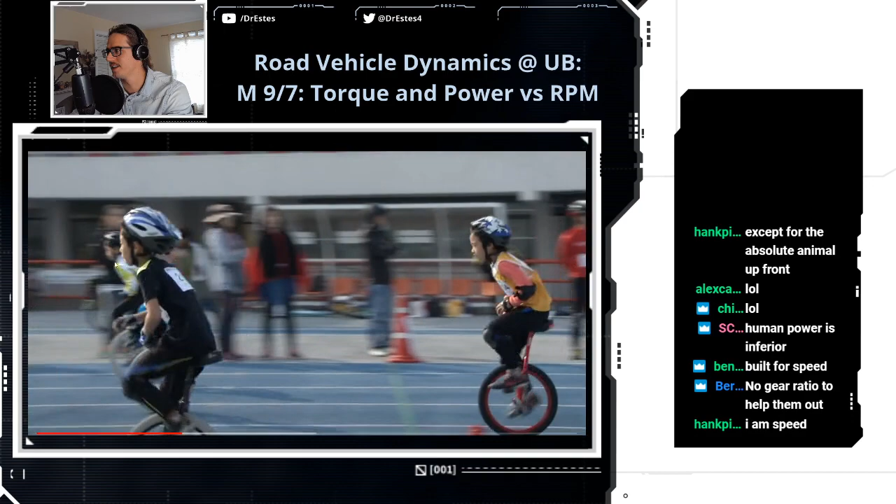All right, these guys, they're not focused, they're not working hard enough. We need to see like a real... whoa. Where's Baxter? I guess he didn't qualify. So in your spare time, just go back and watch that video over and over again. But what I want you to see is you can clearly see a decrease in the torque production over time.

Direct correlation between helmet, aero, and speed. Yeah, it's really about the aerodynamics here.

Okay, but we have a couple minutes left. Let's talk about cars. Just like a cyclist has a limited pedaling speed range over which torque and power are effectively produced - for a cyclist it's around 150 RPM when they're really producing the most power.

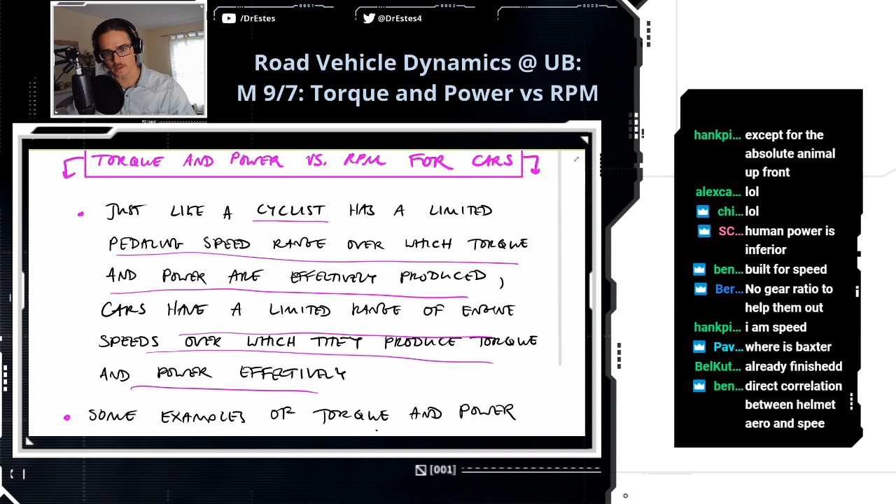Cars also have a limited range of engine speeds over which they produce torque and power effectively. But this is interesting because it can be very different from car to car. Here's some examples below - these I ripped from Road and Track magazine. They have these performance tests, and they tell you more than just power and torque as a function of engine speed. They actually have a lot of information.

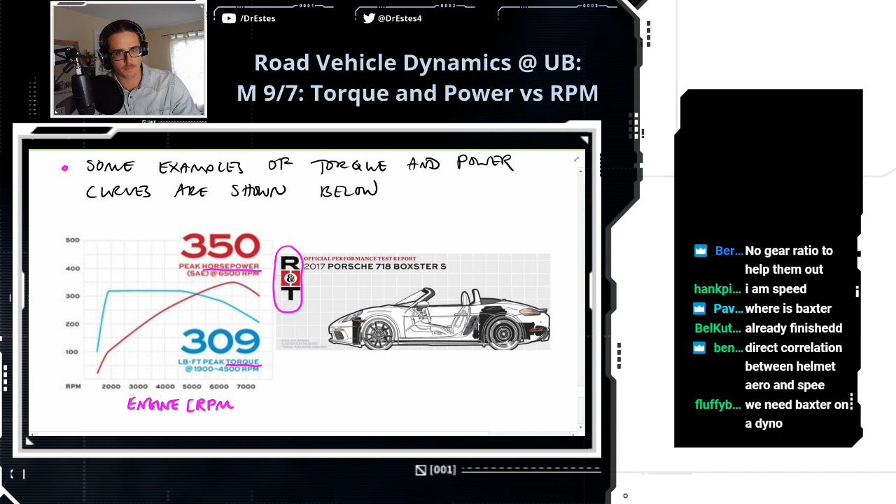Here on the horizontal axis we have engine RPM, and then they show you in blue, this is the torque, and in red, this is the horsepower. Now we actually know the conversions between these two. If you have just the torque and the RPM, you could calculate the horsepower, or if you had the horsepower and the RPM, you could also calculate the torque. So they're functionally related here.

But you see that this is actually - somebody mentioned Baxter - this Porsche is almost like Baxter. Let me explain: if you look at the torque, it's pretty constant for a period of time, and over that period of time, notice what is the power doing? Linearly increasing, just like we saw. Except, unlike Baxter, power cannot increase linearly forever - there is a limit to the power, and so the torque drops off as well at higher RPMs.

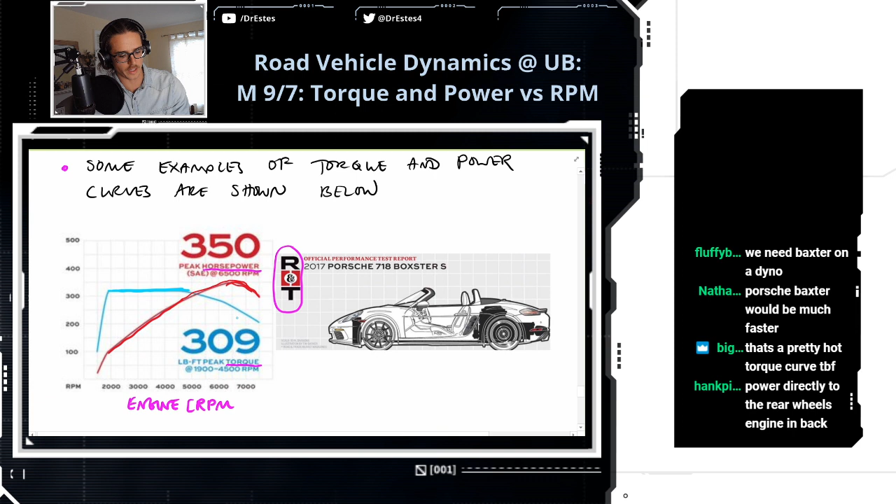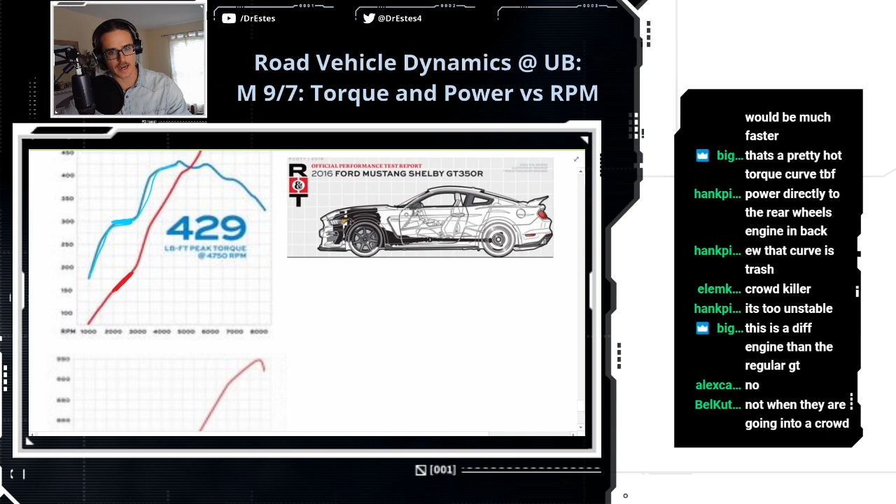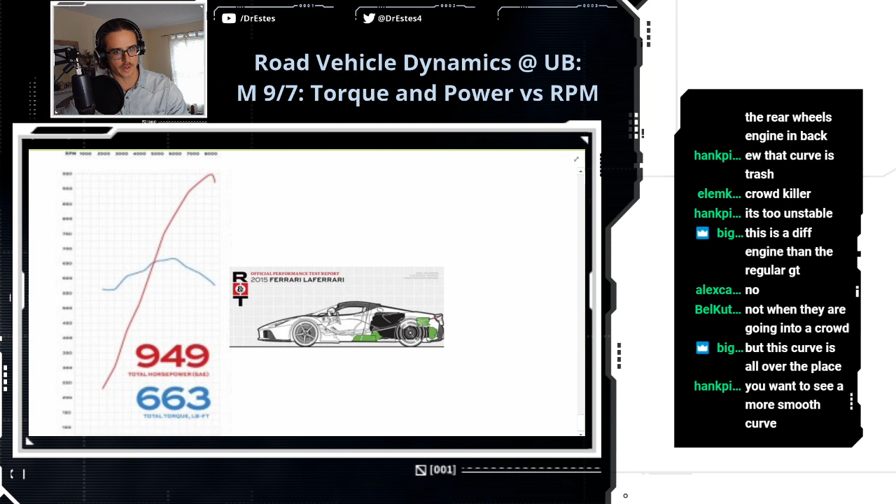Okay, let's look at another one. We're getting more and more stacked here. Look at that power - a 2015 Ferrari LaFerrari. Let's go down, and these things are to scale, by the way. This one's just way taller than the others because it produces all of this horsepower.

So the peak torque, it looks like that happens - I don't know, these numbers are a little too blurry for me to see. Maybe I think that's like 6,500 RPM, something like that. So the sweet spot for this Ferrari in terms of torque is at a much higher RPM than that Porsche we saw earlier.

Oh yeah, I think somebody said red line in the chat. We'll talk more about this, but red line is when you're looking at your RPMs on the dashboard - that's your engine speed. As that gets faster and faster, the dial goes into this red zone. That's the red line, the fastest safe engine speed. You could start to burn things out, but that's also where you're producing the most power. Up at those high speeds is where the peak power of the engine is.

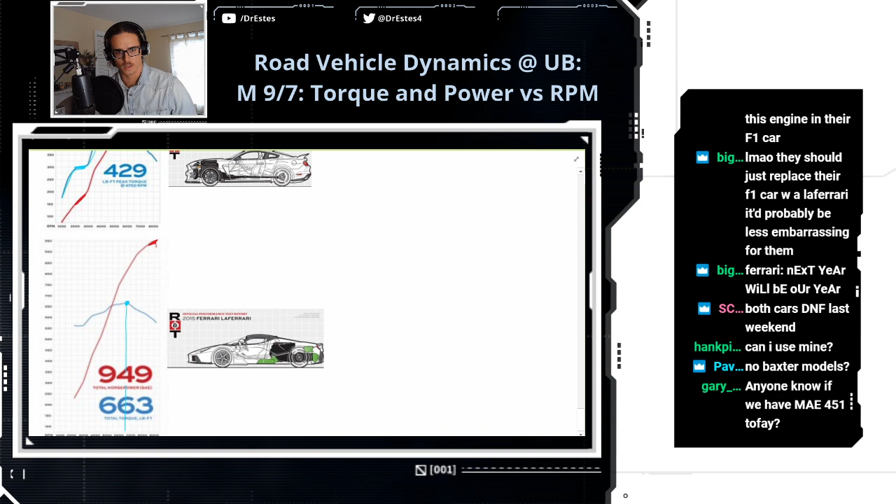So take away from today - Hank says, can I use mine? Oh yeah, your car's pretty sweet. No Baxter models? Well, cars all have their own DNA of how they can produce power and torque at different speeds. Just like a human on a bicycle has their own DNA for that. That's what makes cars pretty interesting. So we'll learn how to simulate how these cars perform, and that'll be good.